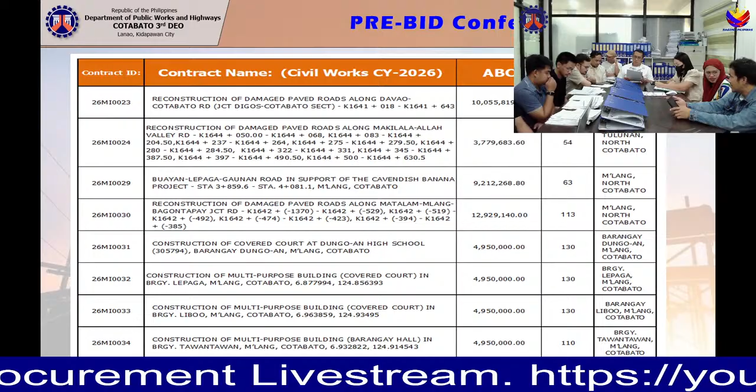For today's meeting, our main agenda is the pre-bid conference for the following projects. 26MI0023, reconstruction of damaged paved roads along the Davao-Cotabato Road, Junction Digos-Cotabato section, kilometer 1641 plus 018 to kilometer 1641 plus 643. The second project is 26MI0024, reconstruction of damaged paved roads along Makilala-Allah Valley Road, kilometer 1644 plus 050 to kilometer 1644 plus 068, kilometer 1644 plus 083 to kilometer 1644 plus 204.5, kilometer 1644 plus 237 to kilometer 1644 plus 264, kilometer 1644 plus 275 to kilometer 1644 plus 279.5, kilometer 1644 plus 280 to kilometer 1644 plus 284.5, kilometer 1644 plus 322 to kilometer 1644 plus 331, kilometer 1644 plus 345 to kilometer 1644 plus 387.5, kilometer 1644 plus 397 to kilometer 1644 plus 490.5, kilometer 1644 plus 500 to kilometer 1644 plus 630.5. The third project is 26MI0029, Buayan-Lepaga-Gaunan Road, in support of the Cavendish Banana Project, Stations 3 plus 859.6 to Station 4 plus 081.1, M'lang, Cotabato.

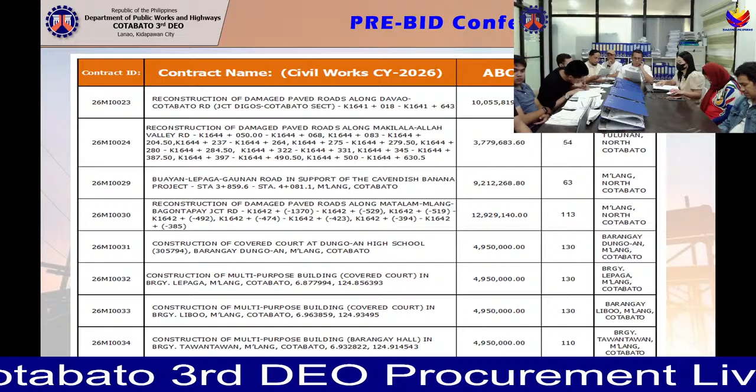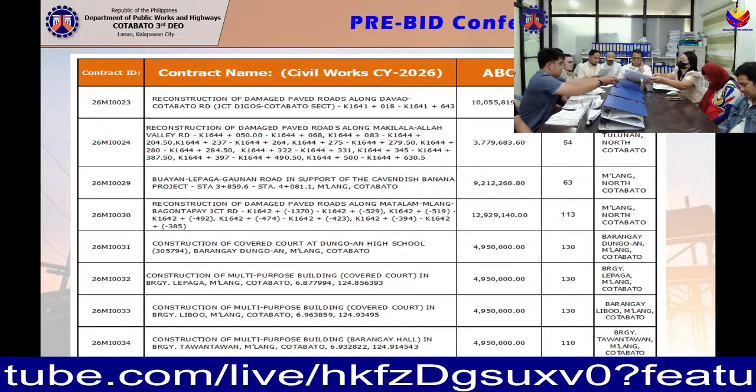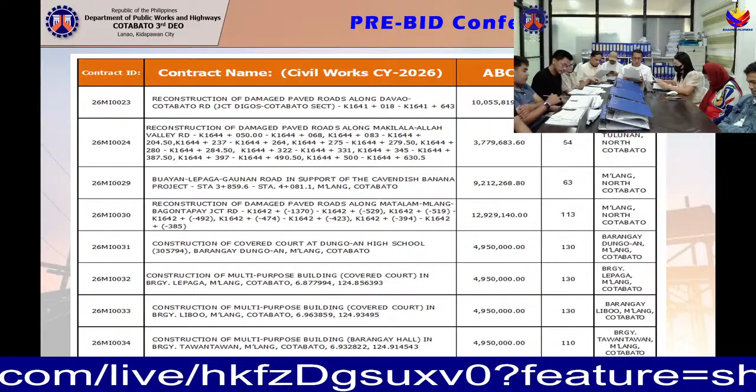The fourth project is 26MI0030, reconstruction of damaged paved roads along Matalam-Mlang-Bagontapay Junction Road, kilometer 1642 plus minus 1,370 to kilometer 1642 plus minus 529, kilometer 1642 plus minus 519 to kilometer 1642 plus minus 492, kilometer 1642 plus minus 474 to kilometer 1642 plus minus 423, kilometer 1642 plus minus 394 to kilometer 1642 plus minus 385.

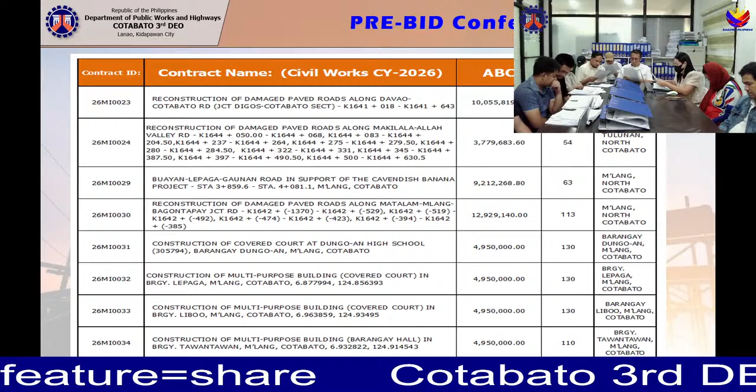The fifth project is 26MI0031, construction of covered court at Dungo-an High School, 305,794, Barangay Dungo-an, M'lang, Cotabato. The sixth project is 26MI0032, construction of multi-purpose building, covered court in Barangay Lepaga, M'lang, Cotabato. The seventh project is 26MI0033, construction of multi-purpose building, covered court in Barangay Liboo, M'lang, Cotabato. The eighth project is 26MI0034, construction of multi-purpose building, barangay hall in Barangay Tawantawan, M'lang, Cotabato.

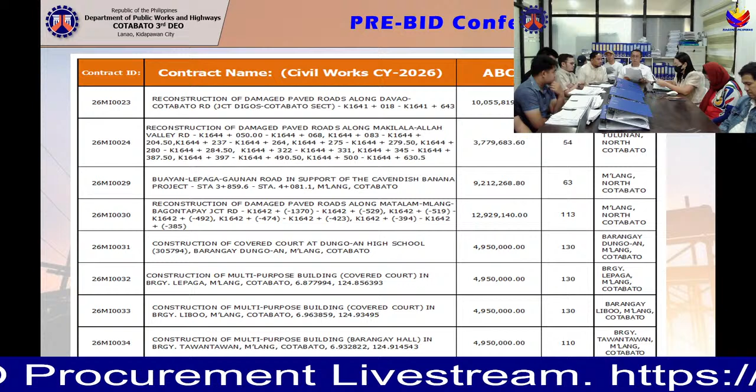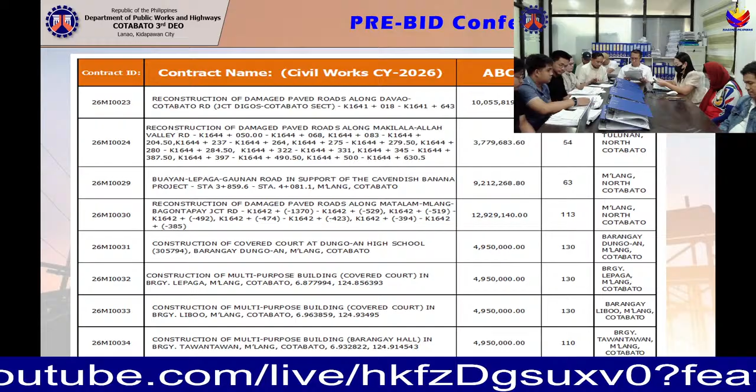So all the listed projects are in the description below. Before we proceed, the committee acknowledges the presence of the representative online. Thank you for your participation. So we now proceed with the presentation of the contract details of the project. We will request the representative from the end user to discuss the details.

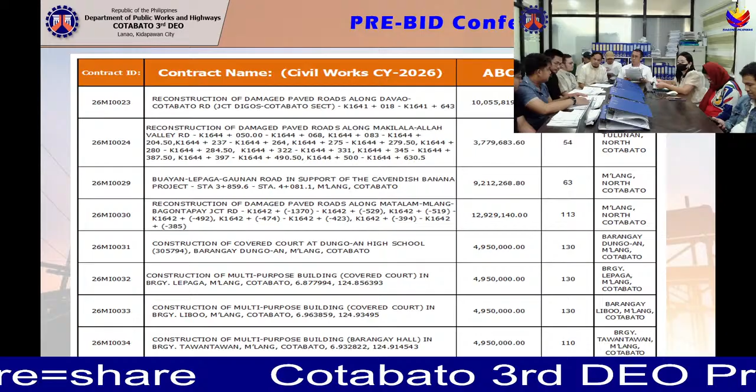Good morning once again. For the first project, we have 26MI0023, the reconstruction of damaged paved roads along Davao-Cotabato Road, Junction Digos-Cotabato section, kilometer 1641 plus 018 to kilometer 1641 plus 643. Project location: Matalam, North Cotabato. Contract duration of 91 days. Funding agreement: GAA 2026. Infra type: reblocking. Target length: 1.250. Unit of measure: lane kilometer.

Description of works to be done: facilities for the engineer, other general requirements, earthwork, sub-base and base course, surface courses, bridge construction, drainage and slope protection structures, miscellaneous structures, materials details, and finishing and other civil works.

Under facilities for the engineer, we have construction of field office for the engineer. Under other general requirements: project billboard or signboard, occupational safety and health program, traffic management, mobilization or demobilization.

Under earthwork, we have removal of actual structure or obstruction, 0.28 meter thick PCCP unreinforced, removal of structures and obstruction concrete, foundation fill, and subgrade preparation of common material.

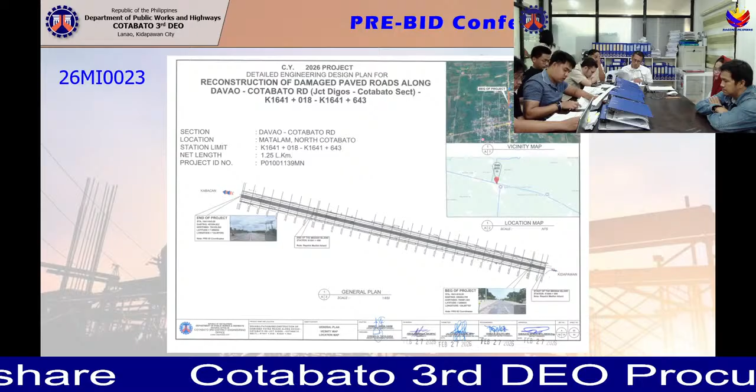Under miscellaneous structures: curb and gutter cast in place, sidewalk 100mm thick, reflectorized thermoplastic pavement markings white, single arm solar LED roadway lighting, 9 meter pole, 80 to 125 watts.

Under finishing and other civil works, painting works for masonry and concrete. Minimum equipment requirement: one backhoe, one payloader, one dump truck, one backhoe with breaker, one plate compactor.

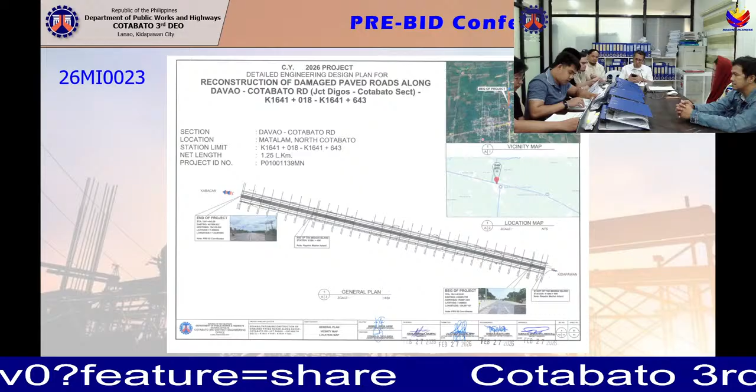One water truck or pump, one motorized trailer, one vibratory roller, four transit mixers, two concrete vibrators, one concrete batch plant, one concrete scaler, one concrete saw, one bar cutter.

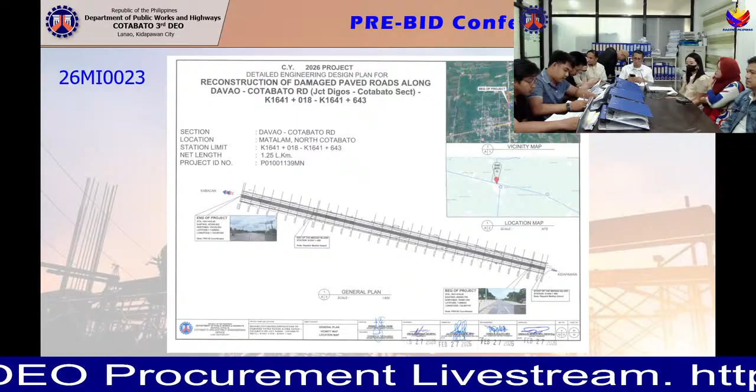One joint sealer machine, one bar bender, one cargo or service truck, one bagger mixer, one applicator machine, one kneading machine, and one boom truck.

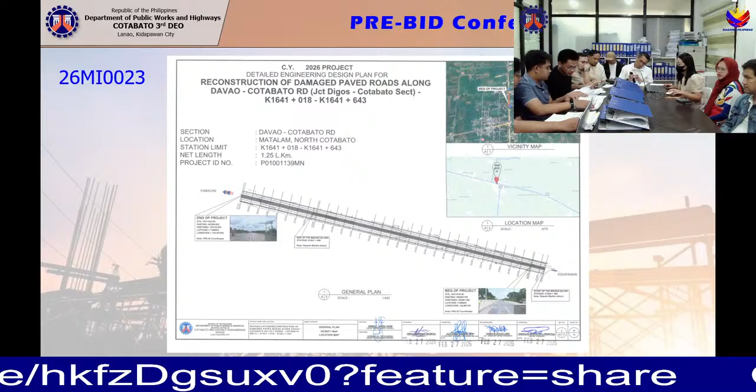For the second project, we have 26 MI 0024, reconstruction of damaged paved roads along Makilala-Allah Valley Road, kilometer 1644 plus 50 to 1644 plus 68.

Kilometer 1644 plus 83 to kilometer 1644 plus 204.50, kilometer 1644 plus 237 to kilometer 1644 plus 264, kilometer 1644 plus 275 to kilometer 1644 plus 279.5, and kilometer 1644 plus 280 to kilometer 1644 plus 284.5.

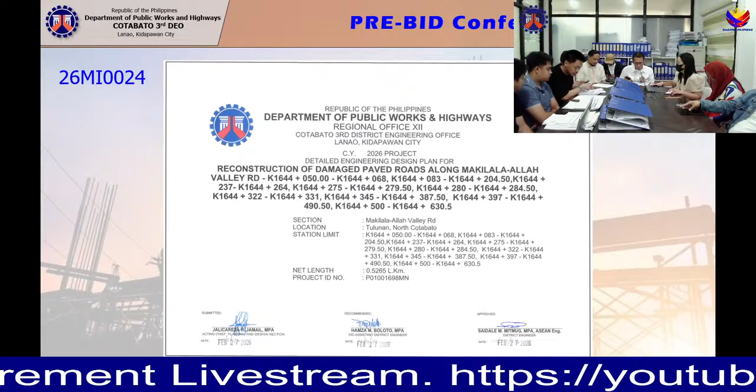Kilometer 1644 plus 322 to kilometer 1644 plus 331, kilometer 1644 plus 345 to kilometer 1644 plus 387.5, kilometer 1644 plus 397 to kilometer 1644 plus 490.5, and kilometer 1644 plus 500 to kilometer 1644 plus 630.5.

Project location: Tulunan, North Cotabato. Contract duration is 54 days. Funding agreement: GAA 2026. Infra type is reblocking, target length 0.5265, unit of measure lane kilometer.

The EO is 77,136.4. Approved budget is 3,779,683.6. And appropriation is 4,103,000.

For the description of work to be done, we have facilities for the engineer, other general requirements, earthwork, sub-base and base course, surface courses, bridge construction, drainage and slope protection structures, miscellaneous structures, and material details.

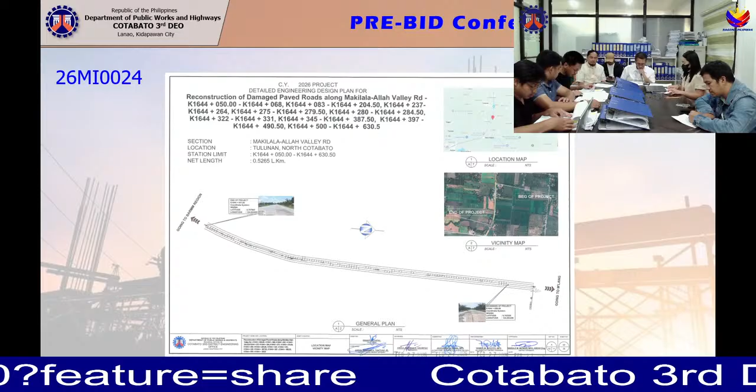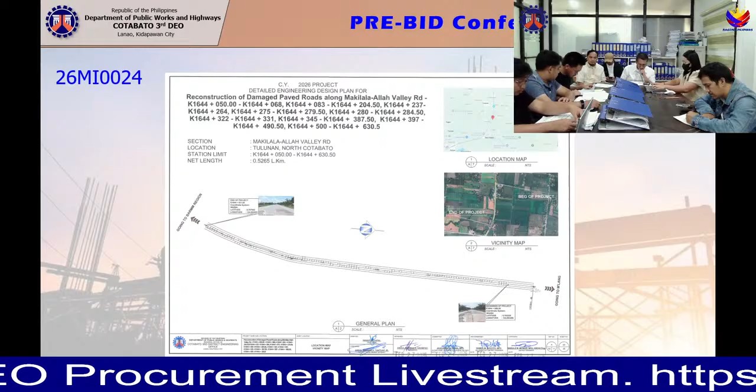For minimum equipment requirement, we have one backhoe, one payloader, one dump truck, one motorized road grader, one vibratory roller, one water truck or pump, four transit mixers, two concrete vibrators, one concrete batch plant, one concrete grader.

One concrete saw, one bar cutter, one cargo service truck, one applicator machine, one kneading machine. For the next project, 26 MI 0029.

Buayan-Lepaga-Gaunan Road in support of the Cavendish Banana Project, stations 3 plus 859.6 to station 4 plus 081.1, North Cotabato.

Project location: North Cotabato. Contract duration of 63 days. With an EO of 188,000 pesos, approved budget for the contract of 9,212,268.80, and appropriation of 9,484,000 pesos.

Description of works to be done: facilities for the engineer, other general requirements, earthwork, sub-base and base course, surface courses, bridge construction, drainage and slope protection structures, miscellaneous structures, and materials details. This project is road concreting, target length 0.443, unit of measure kilometers.

Under facilities for the engineer, construction of field office for the engineer. Under other general requirements: project billboard or signboard, occupational safety and health program, traffic management, mobilization or demobilization.

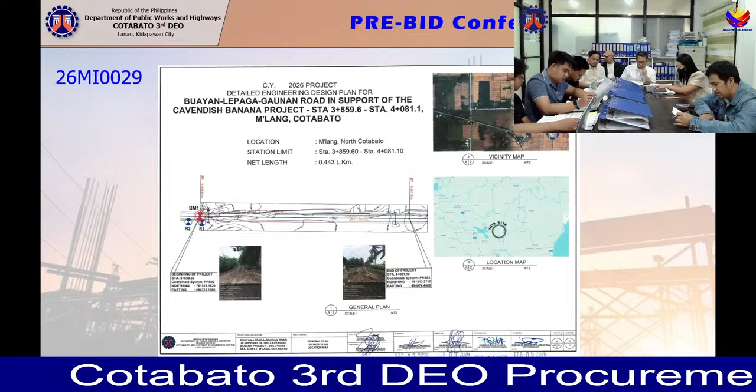Under earthwork, we have clearing and grubbing, removal of actual structure or obstruction, 610 mm diameter RCPC, unsuitable excavation, foundation fill, pipe culverts and drain excavation common soil, embankment from borrow common soil, embankment from roadway or structure excavation common soil, and subgrade preparation common material.

Under sub-base and base course, aggregate sub-base course. Under surface course, Portland cement concrete pavement unreinforced, 0.15 meter thick, 14 days.

Portland cement concrete pavement, unreinforced, 0.28 meter thick, 14 days. Under bridge construction: reinforcing steel grade 40, structural concrete 20.68 MPa class B.

Under drainage and slope protection structures: pipe culverts, 910 mm diameter, class 2 RCPC, grouted riprap class A. Under miscellaneous structures: metal guardrail, metal beam including post, single W beam, metal beam end piece, bull nose, and reflectorized thermoplastic pavement markings applied.

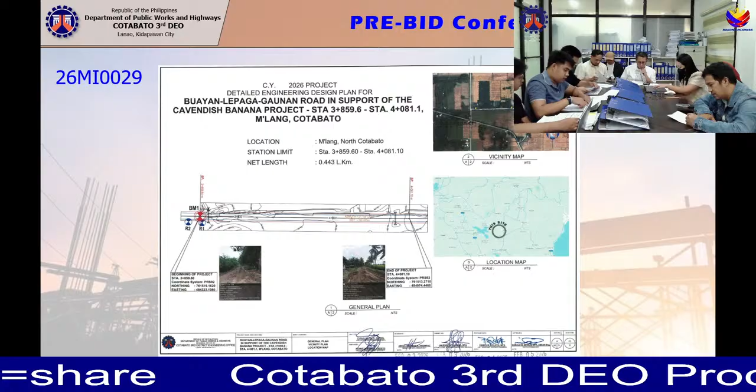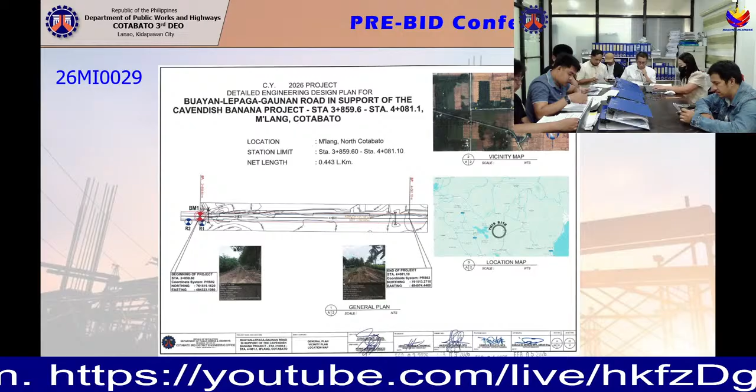Minimum equipment requirement: 2 dump trucks, 1 payloader, 1 bulldozer, 1 backhoe, 1 boom truck, 1 plate compactor, 1 water truck or pump, 1 motorized grader, 1 vibratory roller, 4 transit mixers, 2 concrete vibrators, 1 batch plant, 1 skidder, 1 concrete saw, 1 bar cutter, 1 joint sealer machine, 1 bar bender, 1 cargo service truck, 1 bagger mixer, applicator machine, and kneading machine.

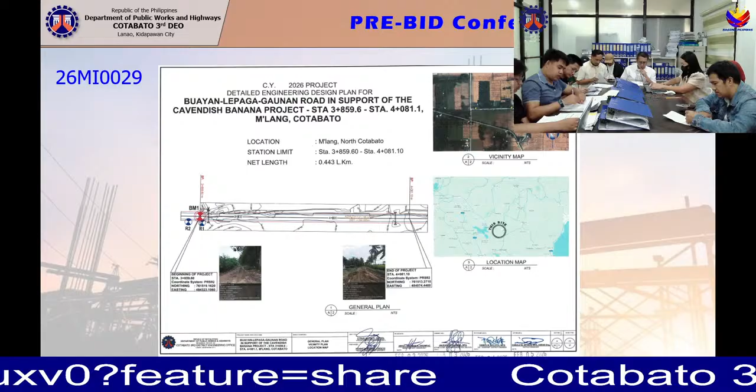For the fourth project, 26MI0030, reconstruction of damaged paved road along Matalam-Mlang-Bagontapay Junction Road, kilometer 1642 plus minus 1370 to kilometer 1642 plus minus 529.

Kilometer 1642 plus minus 519 to kilometer 1642 plus minus 492. Kilometer 1642 plus minus 474 to kilometer 1642 plus minus 423. Kilometer 1642 plus minus 394 to kilometer 1642 plus minus 385.

Project location is Mlang, Cotabato. Contract duration is 113 days. EAO 263,860. Approved budget for contract is 12,929,140. Estimated project component cost is 13,193,000.

Description of work to be done: facilities for the engineer, general requirements, earthwork, sub-base and base course, surface courses, bridge construction, drainage and slope protection structures, miscellaneous structures, and material details.

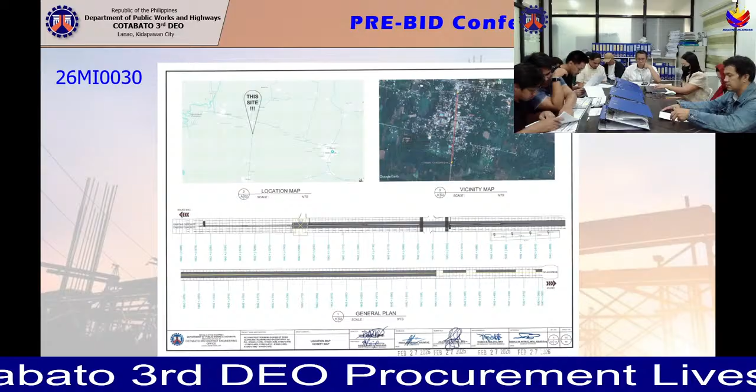Under surface course: Portland cement concrete pavement, unreinforced, 0.28 meters thick, 14 days. Under bridge construction: reinforcing steel grade 40, reinforcing steel grade 60, structural concrete 20.68 MPa class A, 28 days, structural concrete 20.68 MPa class B.

Under drainage and slope protection structures: culverts, 910 millimeters diameter, class 2 RCPC, manholes, 910 millimeter diameter concrete.

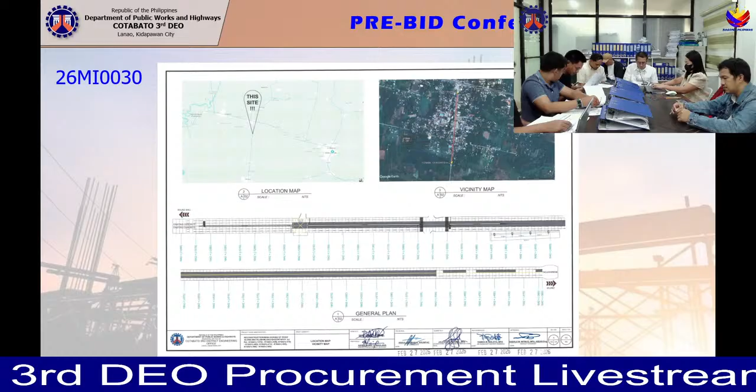Under miscellaneous structures: guide or information signs G1 to 3, advanced direction signs, stop signs, reflectorized thermoplastic pavement markings white, reflectorized thermoplastic pavement markings yellow.

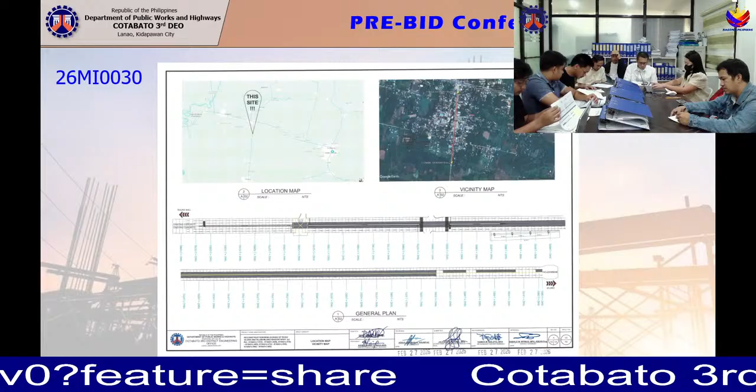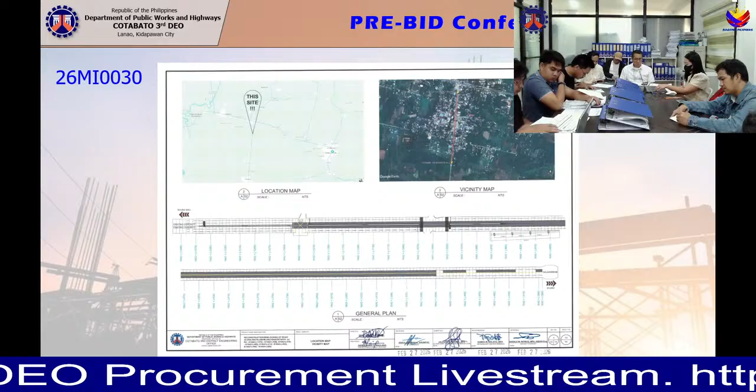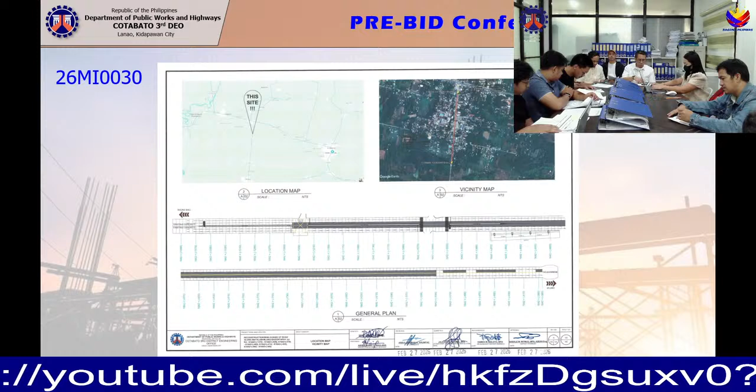Minimum equipment requirement: one backhoe, one payloader, one dump truck, one backhoe, one boom truck, one road grader with one plate compactor, one truck or pump, one motorized road grader, one vibratory roller, four transit mixer, two concrete vibrator, one concrete batch plant, one concrete spreader, one concrete saw, one bar cutter, one bar bender, one cargo or service truck, one bagger mixer, one cargo or service truck, one applicator machine, one kneading machine.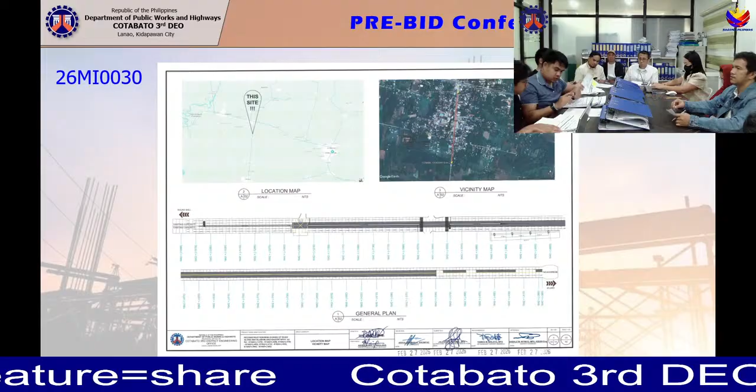For the next project, 26MI0031, construction of covered court at Dunguan High School, 305794, Barangay Dunguan, Matalam, Lang, Cotabato. Project location: Barangay Dunguan, M'lang, Cotabato.

Contract duration of 130 calendar days. EAO of 1%, 50,000 pesos, and approved budget for the contract, 4,950,000 pesos, and appropriation of 5 million pesos.

Description of works to be done: facilities for the engineer, other general requirements, earthwork, reinforced concrete, finishing and other civil works, and electrical. Under facilities for the engineer: construction of field office for the engineer.

Under other general requirements: permits and clearances, project billboard or signboard, occupational safety and health, mobilization or demobilization.

Under earthwork: structure excavation common soil, embankment from roadway or structure excavation common soil, embankment from borrow common soil, and gravel fill. Under reinforced concrete: structural concrete class A, 28 days, reinforcing steel deformed grade 40, reinforcing steel deformed grade 60, reinforcing steel plain or round, formworks and false works.

Under finishing and other civil works: ceiling 4.5mm metal frame fiber cement board, wall 4.5mm metal frame fiber cement board, fabricated metal roofing accessory gauge 26, 0.551mm, ridge or hip rolls, pre-painted metal sheets above 0.427mm, corrugated type, long span.

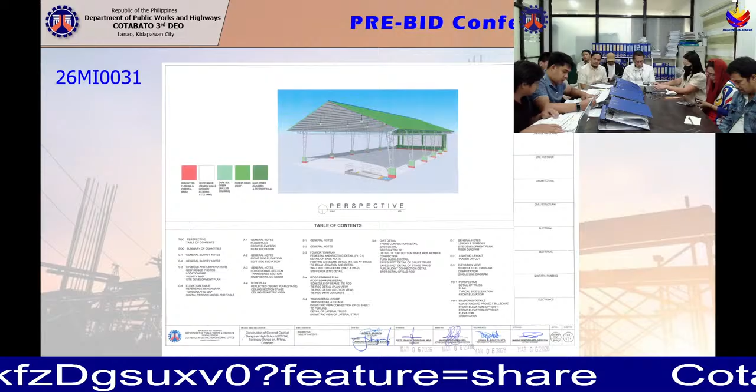Under electrical: conduits, boxes and fittings, wires and wiring devices, panel board with main and branch breakers, and lighting fixtures. Minimum equipment requirements: one backhoe, one bar bender, one bar cutter, one cargo truck, two dump trucks.

One cutting outfit, one bagger mixer, one plate compactor, one truck mounted crane, one concrete vibrator, and two welding machines. Total of 13 minimum equipment requirements.

For the next project, 26MI0032, construction of multi-purpose building covered court in Barangay Lipaga, Mlang-Bagontapay, Cotabato.

6.8779, 124.856393. Project location, Barangay Lipaga-MLANG-BAGONTAPAY, Cotabato. Contract duration, 130 calendar days.

Funding agreement GAA 2026, with an EAO of 50,000, and approved budget for the contract of 4,950,000, with an appropriation of 5 million.

Description of works to be done: facilities for the engineer, other general requirements, earthworks, reinforced concrete, finishing and other civil works, electrical.

Under facilities for the engineer: construction of field office for the engineer. Other general requirements: permits and clearances, project billboard or signboard, occupational safety and health, mobilization or demobilization, earthwork, individual removal of trees.

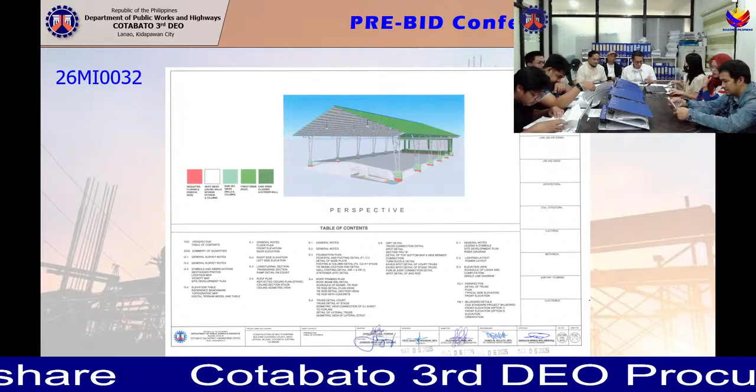fiber cement board, CHB non-load bearing including reinforcing steel 100 mm, cement plaster finish, painting works or masonry or concrete, painting works steel, roof framing and roofing works, fabricated metal roofing accessories gauge 26, 0.551 mm ridge or hip

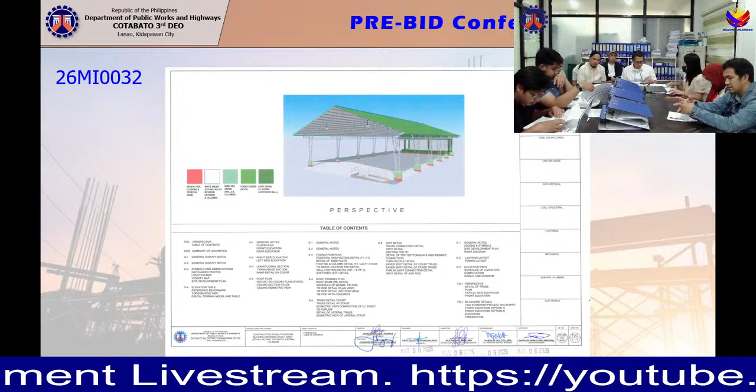rolls, fabricated metal roofing accessories gauge 26, 0.551 mm flashing, pre-painted metal sheets above 0.427 mm corrugated long span, structural steel trusses, structural steel purlins, metal structure accessories, electrical, conduits, boxes and fittings or conduit works or conduit

rough-in, wires and wiring devices, panel board with a main branch breaker, lighting fixtures. Minimum equipment requirement: one backhoe, two dump trucks, one plate compactor, one bagger mixer, one concrete vibrator, one bar cutter, one bar bender, two welding machines, one cutting outfit, one truck mounted crane, and one chainsaw, with a total of 13 minimum equipment.

For the next project, we have 26MI0033, construction of multi-purpose building covered court in Barangay DIGOS-COTABATO, Cotabato.

6.963859, 124.93495. Project location, Barangay DIGOS-COTABATO, Cotabato. Contract duration of 130 calendar days.

Funding agreement, GAA 2026, EAO of 1%, equivalent to 50,000 pesos, and approved budget for the contract of 4,950,000, with an appropriation of 5 million pesos.

Description of works to be done: facilities for the engineer. Under general requirements: earthwork, reinforced concrete, finishing and civil works, and electrical.

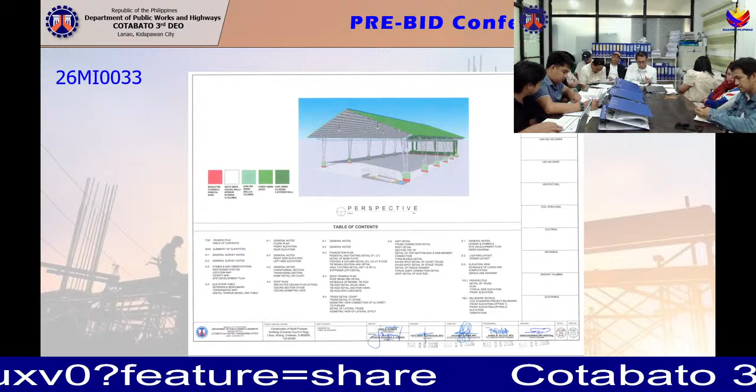Under reinforced concrete: structural concrete class A, 28 days, reinforcing steel deformed grade 40, reinforcing steel deformed grade 60, reinforcing steel plain or round, formworks and false works.

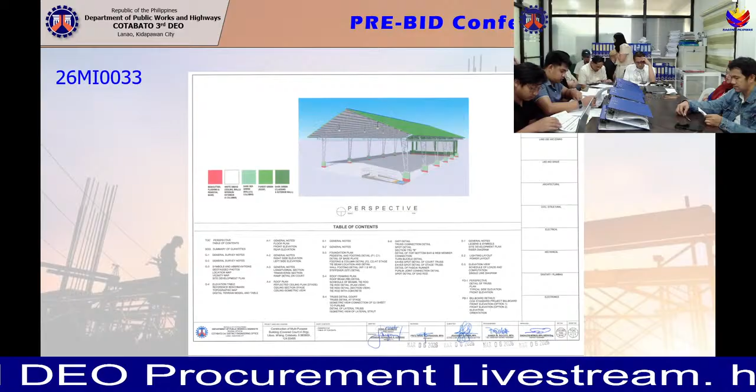Under finishing and other civil works: ceiling 4.5 mm metal frame fiber cement board, wall 4.5 mm metal frame fiber cement board, fabricated metal roofing accessory gauge 26, 0.551 mm ridge or hip rolls, fabricated metal roofing accessory,

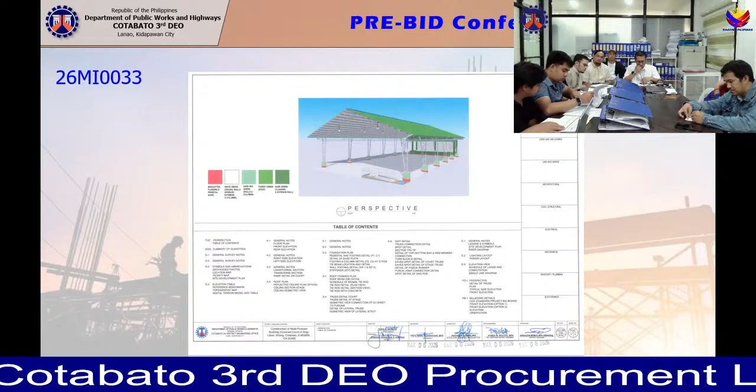gauge 26, 0.551 mm flashing, pre-painted metal sheets above 0.427 mm, corrugated type, long span, cement plaster finish, painting works, masonry or concrete, painting works steel, CHB non-load bearing including reinforcing steel 100 mm, metal structural accessories, structural steel trusses,

and structural steel purlins. Under electrical: conduits, boxes and fittings, wires and wiring devices, panel board with main and branch breakers, and lighting fixtures.

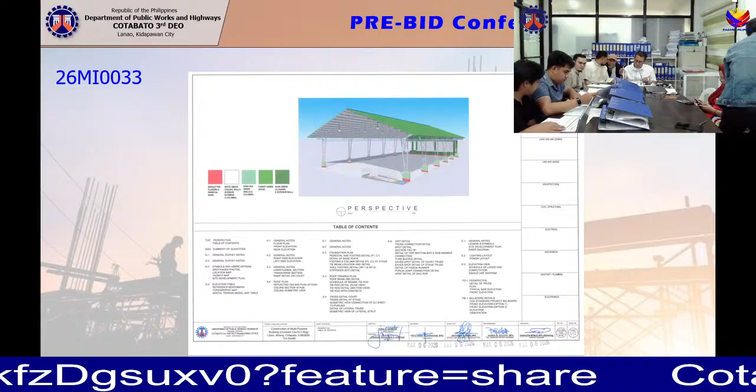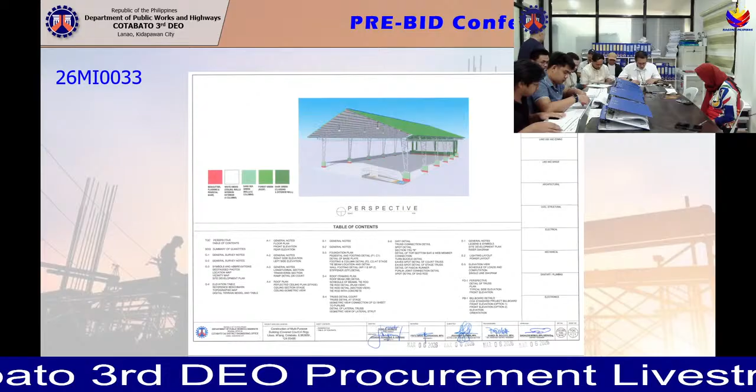Minimum equipment requirement: one backhoe, one bar bender, one bar cutter, one cargo truck, two dump trucks, one cutting outfit, one bagger mixer, one plate compactor, one truck mounted crane, one concrete vibrator, and two welding machines, total of 13 minimum equipment requirement.

For the last project, 26MI0034, construction of multi-purpose building Barangay Hall in Barangay Tawan-Tawan, M'lang, Cotabato. 6.932822, 124.914543. Project location, Barangay Tawan-Tawan, M'lang, Cotabato.

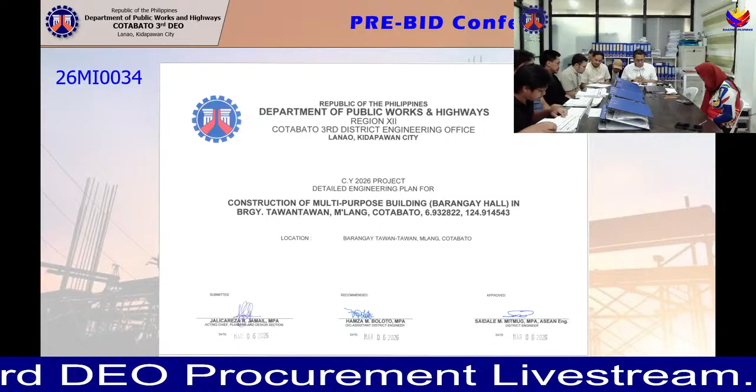Contract duration, 110 calendar days. With an EO of 50,000 and approved budget for the contract of 4,150,000, with an appropriation of 5 million.

Description of works to be done: facilities for the engineer, other general requirements, earthwork, reinforced concrete, finishing and other civil works, electrical and mechanical.

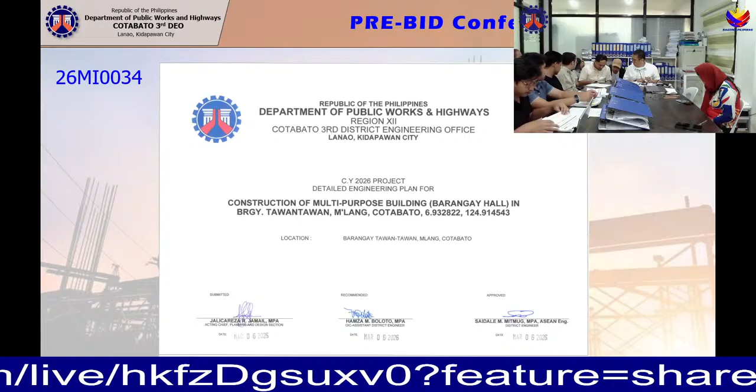Under facilities for the engineer: construction of field office for the engineer. Other general requirements: permits and clearances, project billboard or signboard, occupational safety and health, mobilization and demobilization, earthworks,

structure excavation common soil, embankment from the roadway or structure excavation common soil, embankment from borrow common soil, gravel fill, reinforced concrete, structural concrete class A 28 days, reinforcing steel deformed grade 40, formworks and false works.

Finishing and other civil works: catch basin, sewer line works, storm drainage and downspout, septic vault or tank, concrete or CHB, plumbing fixtures, cold water lines, ceiling, 4.8 mm metal frame, fiber cement board ceiling, metal frame, pre-painted metal panel, aluminum glass windows, wooden doors and windows, fabricated metal roofing accessories, gauge 24, 0.71 mm gutter, pre-painted metal sheets long span, corrugated type above 0.427 mm, glazed tiles and trims, unglazed tiles, synthetic granite tiles, cement plaster finish.

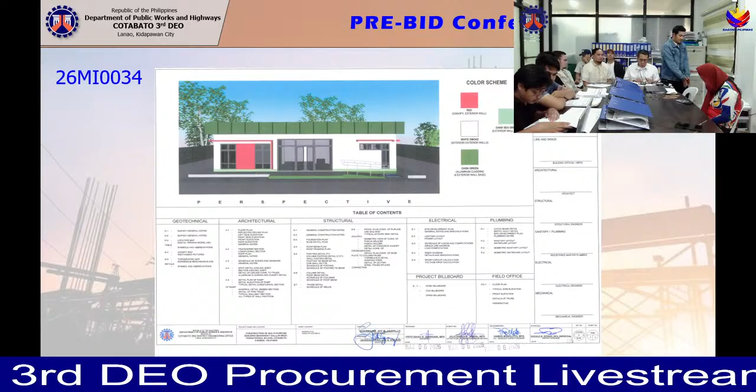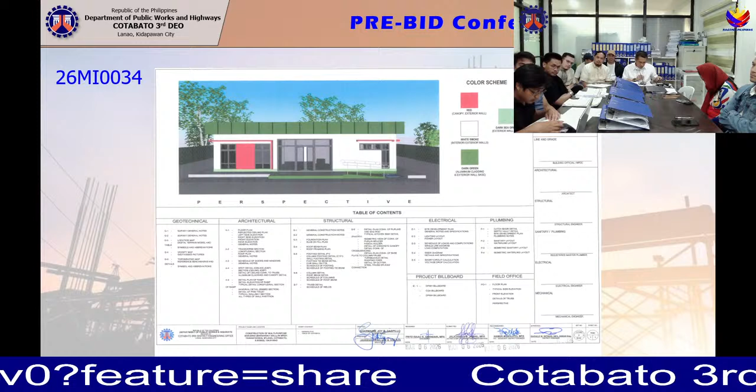Painting works for masonry or concrete, painting works for steel, reflective insulation, aluminum cladding, CHB non-load bearing including reinforcing steel 100 mm, CHB non-load bearing including reinforcing steel 150 mm, metal accessories, structural steel or trusses, structural steel or purlins, electrical works including conduits, boxes, and fittings.

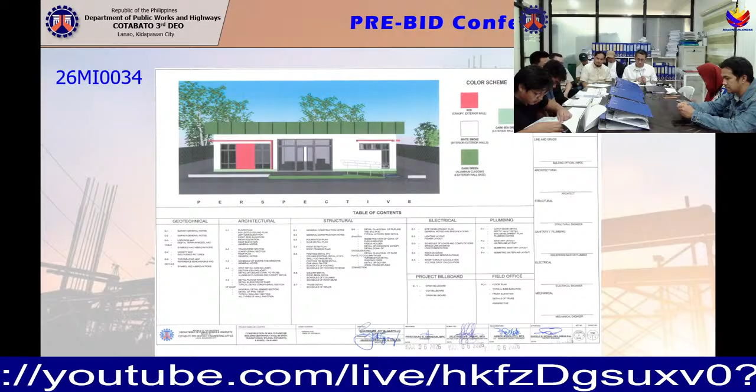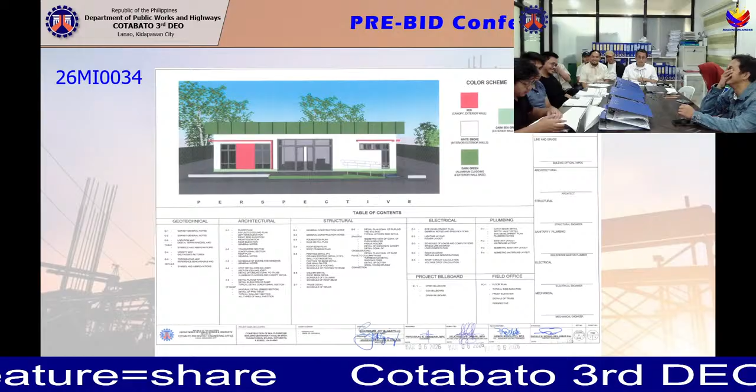Wire and wiring devices, panel board with main and branch breakers, lighting fixtures, mechanical and air conditioning system, fire extinguisher 9.07 kilogram ABC with bracket, fire alarm system. Minimum equipment requirement: one backhoe, one bar bender, one bar cutter, one boom truck, one concrete vibrator, one cutting outfit, two dump trucks, one bagger mixer, one plate compactor, one truck crane, two welding machines, with a total of 13 minimum equipment.

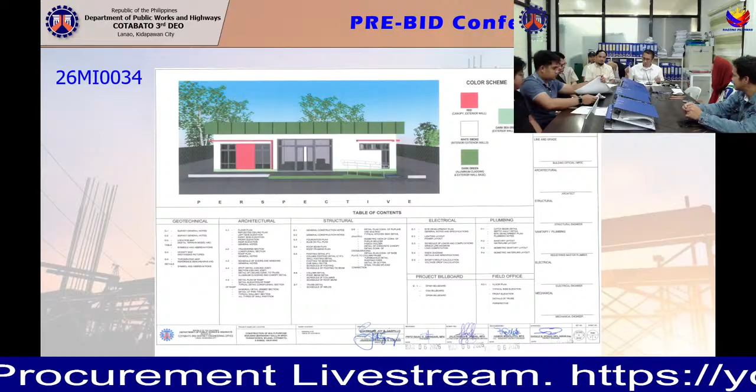So we will now proceed with the proposal requirements for the submission of the bidding documents that need to be complied with by the contractor. May we request Jason to discuss the set requirements.

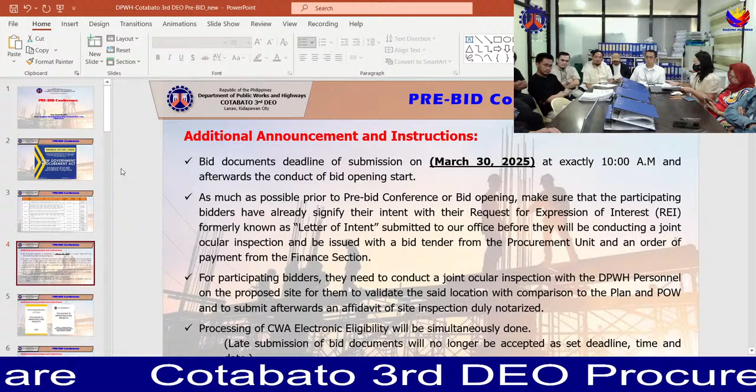As for the procurement requirement, we are using Republic Act number 12009, or the new Government Procurement Act. These are the corresponding 8 projects for this pre-bid conference. The bid documents deadline of submission will be on March 30, 2025 at exactly 10 a.m.

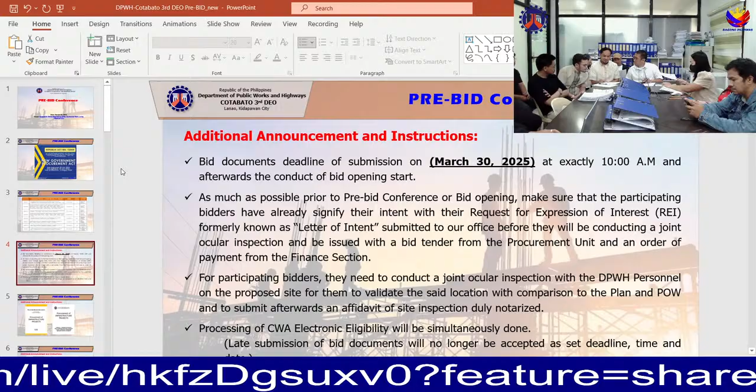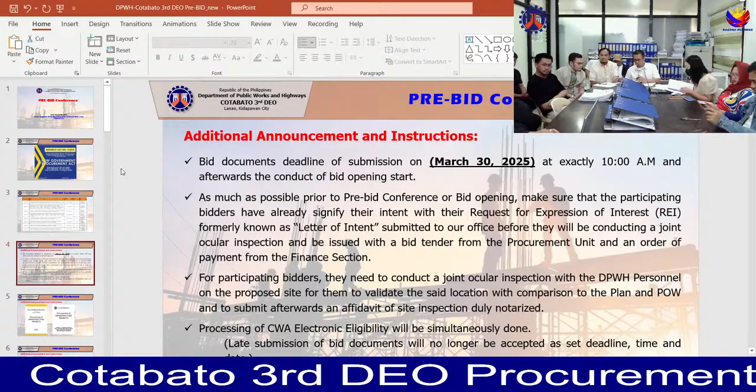As much as possible, prior to the pre-bid conference or bid opening, participating bidders should signify their intent with a request for expression of interest, or REI. Participating bidders need to conduct a joint site inspection with DPWH personnel to validate the said location in comparison to the plan and POW.

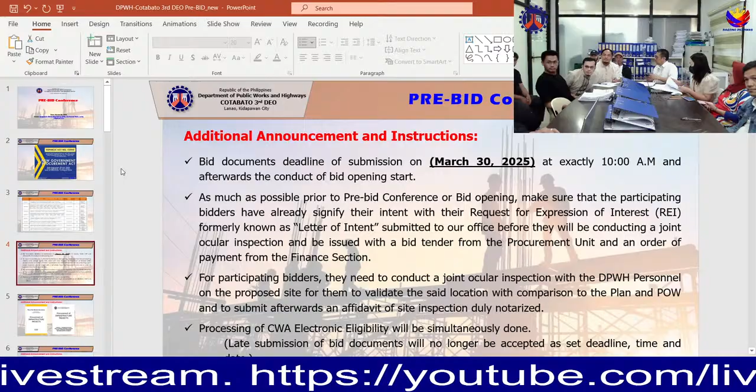Processing of CWA electronic eligibility will be done simultaneously. Late submission of bid documents will no longer be accepted past the set deadline, time, and date.

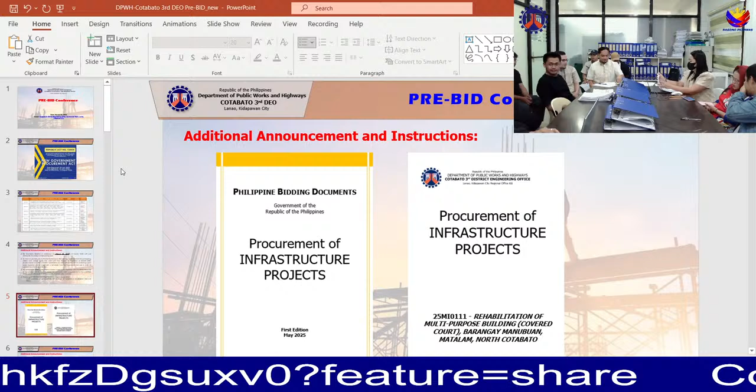For RA 12009, we are using the first edition of the Philippine Bidding Documents, last revised May 2025. This is the sample of the Philippine Bidding Document. Other additional instructions and requirements upon posting include the checklist for the technical and financial components of your bid.

These are the following: valid PhilGEPS registration under Section 20 of the IRR of RA 12009. It must be valid at the time of the bid opening, and it shall be signed per page.

Next, we have the GIS for the corporation and BOI, or the Beneficial Ownership Information, for individual contractors. The original document referred to must have an acknowledgement sheet from the Securities and Exchange Commission.

Another requirement is the statement of all ongoing government and private contracts, including contracts awarded but not yet started. Second, the statement of the bidder's single largest completed contract similar to the contract to be bid, under Section 52.4.13 of the IRR of RA 12009.

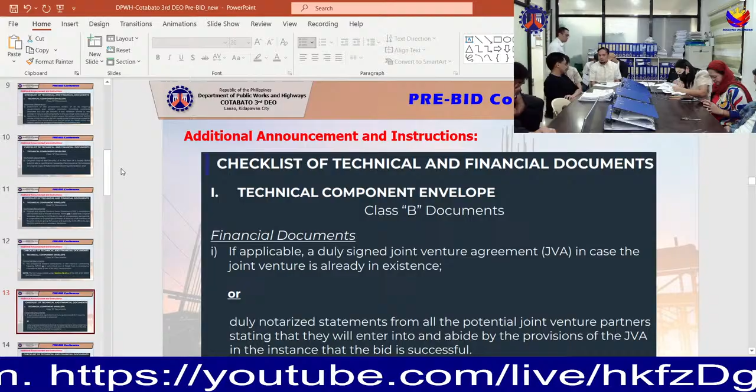If applicable, we have the duly signed joint venture agreement, a duly notarized statement from all potential joint venture partners that will enter into the contract.

Under the financial envelope, we have the duly signed and accomplished financial bid form, and the duly signed and accomplished price schedule. Other requirements include certification from the DTI if the bidder claims preference as a domestic bidder or domestic entity.

So these are the forms we used under RA 12009: the omnibus sworn statement, which has 11 instructions, and must be duly notarized.

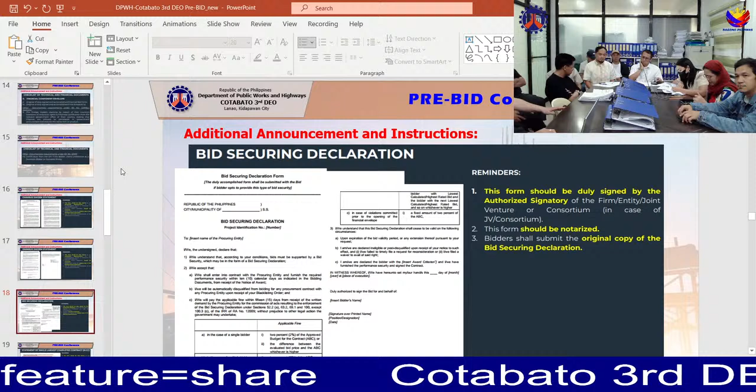Then we have the bid securing declaration. It is also attached in the bid documents, which can be downloaded from PhilGEPS and the DPWH website.

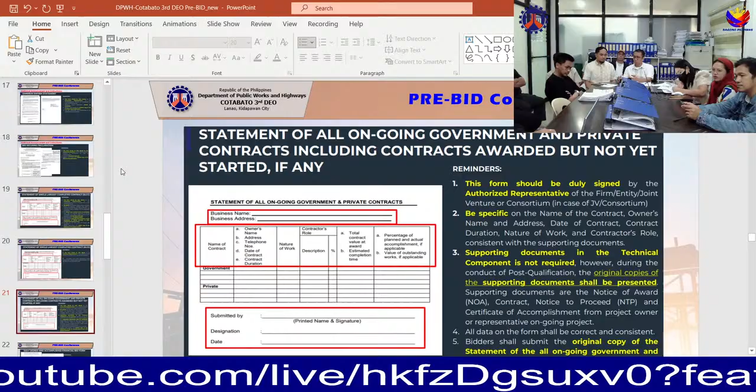Statement of single largest completed contracts, or the SLCC, which is a standard form. Then we also have the statement of all ongoing government and private contracts, including contracts awarded but not yet started.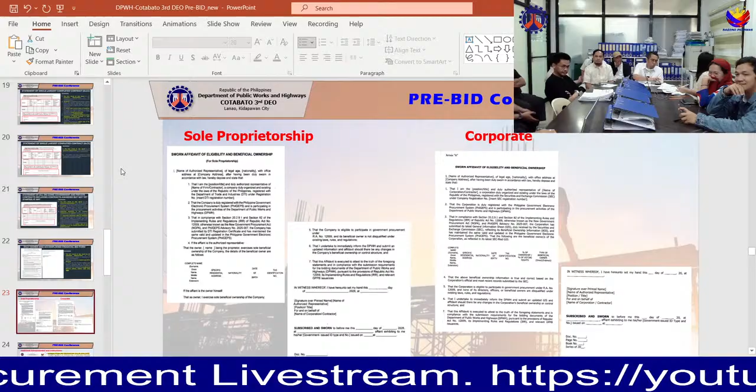Then we have the duly signed and accomplished financial bid form. These are the sample forms for the BOI, for sole proprietorship and corporate entities.

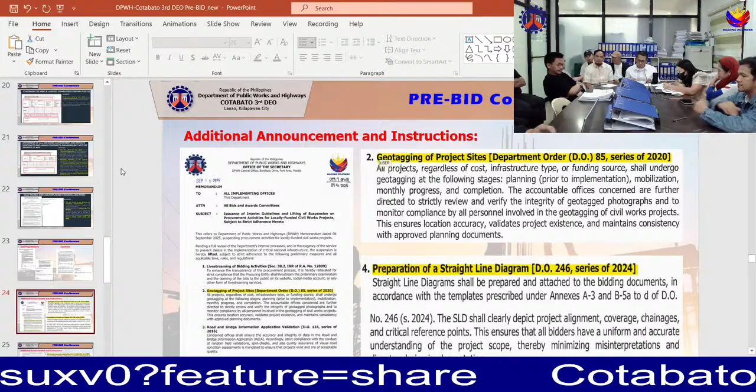Please note that using a non-prescribed form can lead to disqualification. So we have additional requirements to be included in your bid documents.

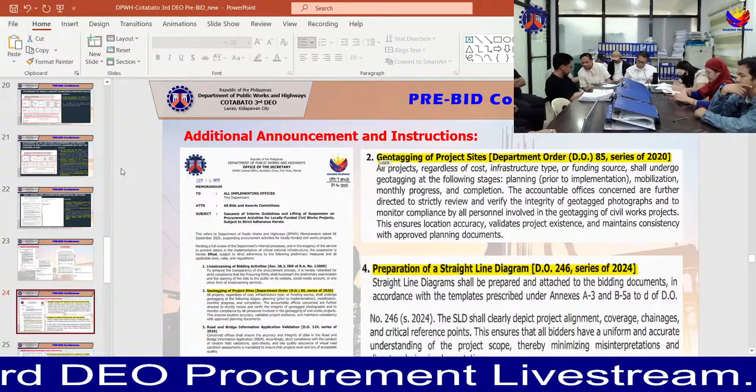We have the geotagging of project sites, under DO 85 series of 2020. Then the preparation of the straight line diagram, under DO 246 series of 2024.

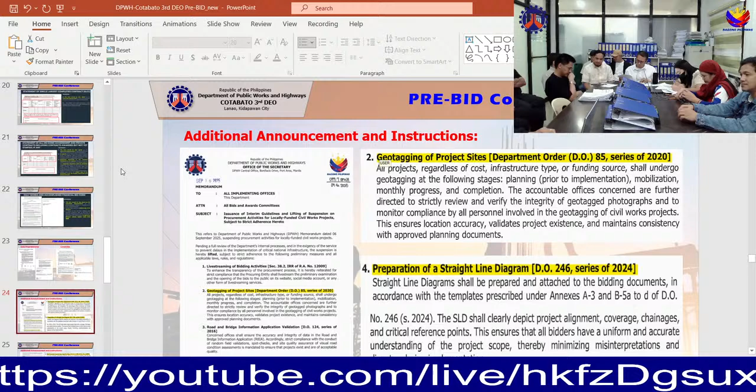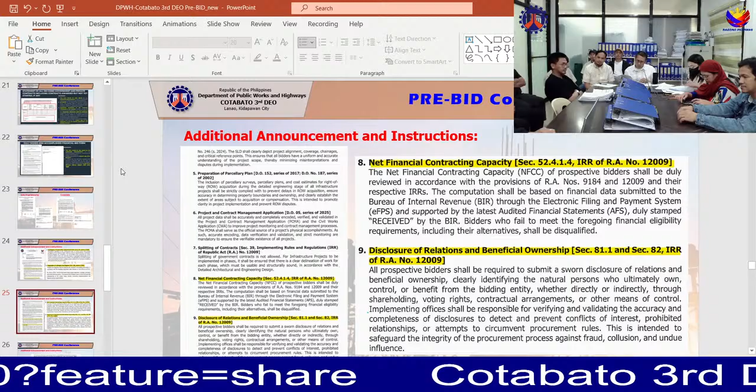Just to mention again, the NFCC under Section 52. Then we have the disclosure of relationship and beneficial ownership.

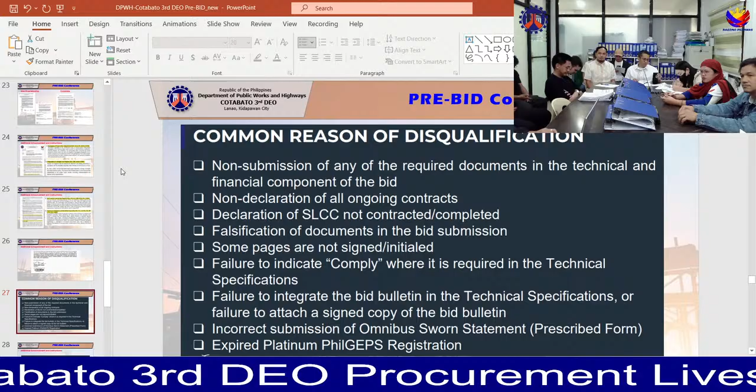Some pages are not signed or initialed. Failure to indicate comply where required in the technical specification. Failure to integrate the bid bulletin in the technical specification, or failure to attach the signed copy of the bid bulletin if there's any. Incorrect submission of omnibus sworn statement and prescribed form, and expired platinum PhilGEPS registration.

Then we have the non-submission of proof of ownership as specified in the bidding documents. So our bid envelopes are composed of 3: we have 2 original documents and 1 copy. The original is composed of 2 sealed envelopes, the technical and financial documents, and copy 1 of the same signature.

So certificate of PCAB registration, particularly on civil works, should be platinum membership and should not expire, otherwise it will result in outright disqualification. So the list of eligibility documents includes DTI, mayor's permit, tax clearance, audited financial statement, PCAB, and validated Annex A of PCAB certificate.

So the same proof of renewal should also be submitted in the CWA for updating, so failure to do so will result in disqualification as per RA 12009.

Photocopy documents, they should present their original documents to the procurement unit for validation to be certified as true copy, such as CTC, or should secure a CTC from where the documents originated. For example, the business permit, PCAB, tax clearance, and audited financial statement.

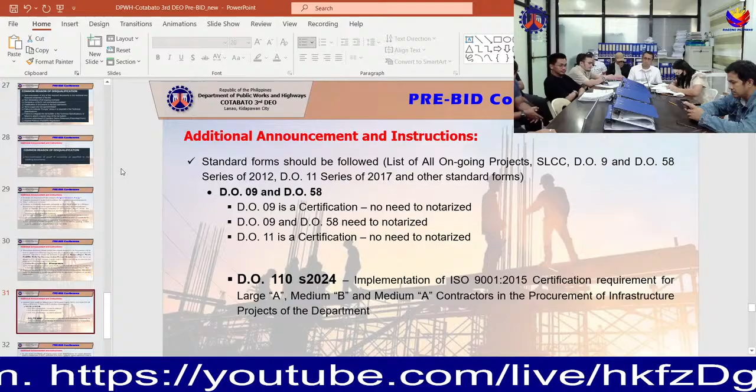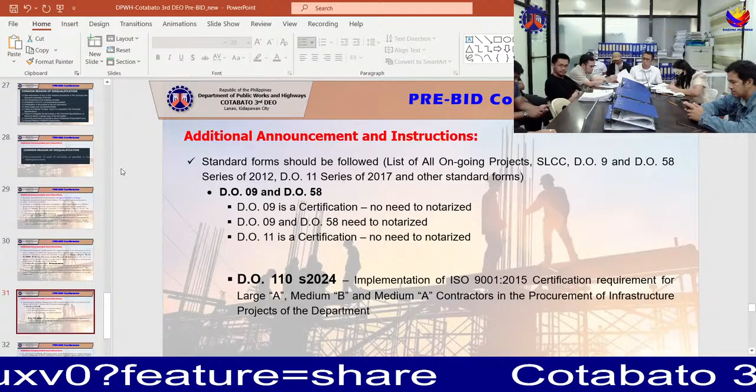Then additional requirement, we have the DO9 and DO58, which is also included in our checklist. The DO110 series of 2024, the implementation of ISO 9001:2015, the certification requirement for large A, medium B, and medium A contractors in the procurement of infrastructure projects of the department.

So for joint ventures, all ongoing projects for both bidder and contractor, the required attachment should be included, while on SLCC attachment of the partner having the required experience should be included. So secretary's certificate for corporate needs to be notarized.

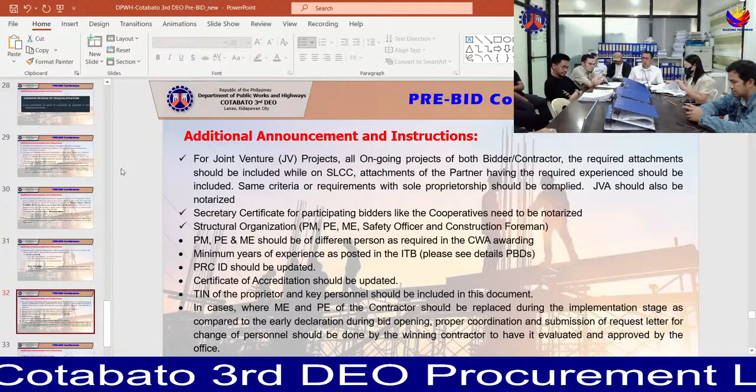Structural organization: the project manager, project engineer, materials engineer, safety officer, and construction foreman. So PRC ID should be updated, and the TIN of the proprietor and key personnel should be included in this document.

Pledge of equipment for the contract: minimum requirement for equipment should be followed with attached clear copy of updated CR and OR of the vehicles used. The list of equipment should coincide with the attachment and the proof of ownership or lease. Lease contract should also comply with the required attachment of the vehicle in a clear copy.

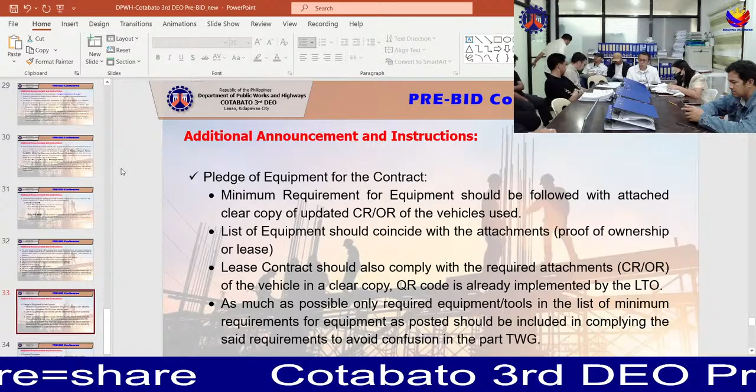The QR code is already implemented by the LTO. So as much as possible, only required equipment tools and the minimum requirements for equipment as posted should be included in complying with the said requirements, to avoid confusion on the part of the technical working group.

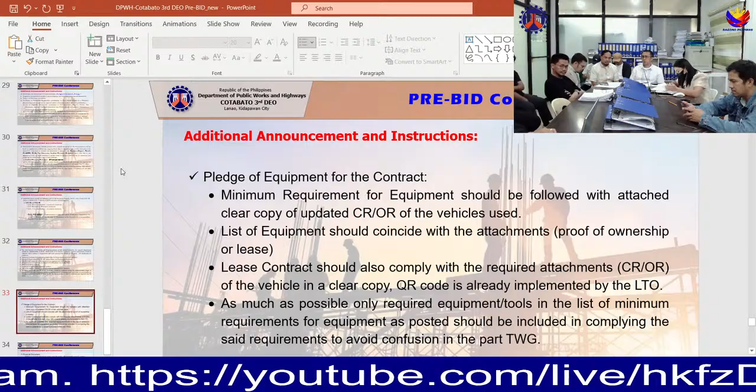So the BOQ as posted should be followed: item number, description, and quantity.

So notices will be sent through email and courier if there were notice of ineligibility immediately, since we are required by COA to submit the contract documents within prescribed time.

Post-qualification requirements should be submitted within 5 calendar days after the issuance of notice of lowest calculated bid. So any requirements to be submitted within 10 calendar days as required.

Bid bulletins will be issued in some instances where there are clarifications and changes in the schedule of bid opening, and supplemental bulletins will be issued for any amendments as posted in the instruction to bidders, particularly on some changes. So bid bulletins will be posted 7 calendar days prior to the bid opening.

So please visit PhilGEPS and DPWH websites for your reference. We encourage the participating bidders to please visit the website. We posted our bidding documents, particularly on PhilGEPS and DPWH websites, for you to check possible changes in item description or quantity, even possible change of the schedule of procurement activities.